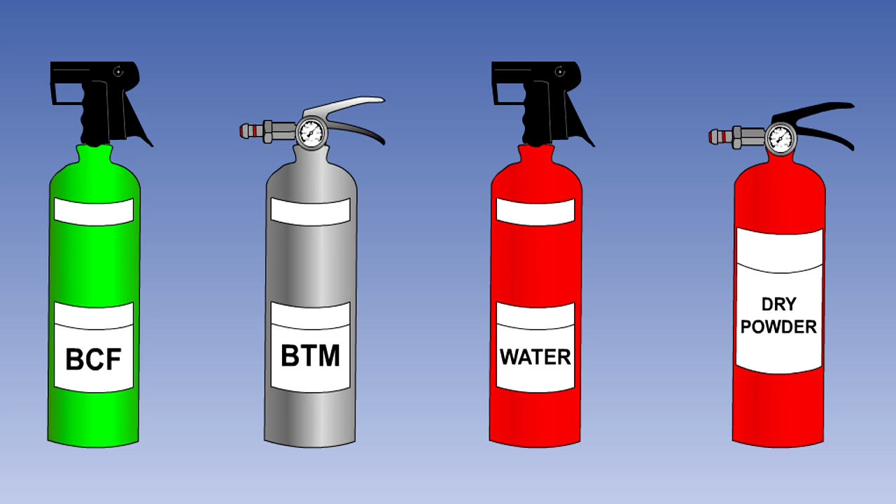Bromochloro-difluoromethane, BCF, is the most commonly used agent. It is also known as Halon 1211. It is stored in signal red, purple, brown, or green containers.

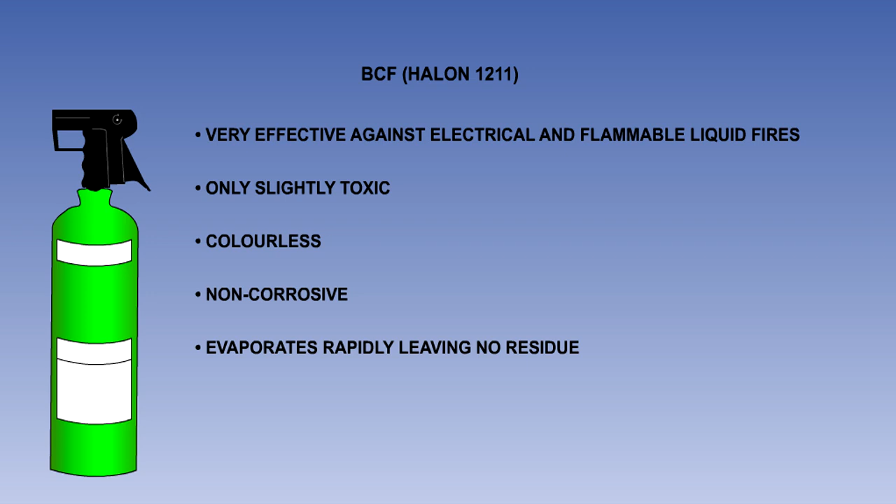This agent is very effective against electrical and flammable liquid fires. It is only slightly toxic. It is colourless, non-corrosive, and evaporates rapidly, leaving no residue. It does not freeze or cause cold burns, and will not harm fabrics, metals, or other materials it comes into contact with.

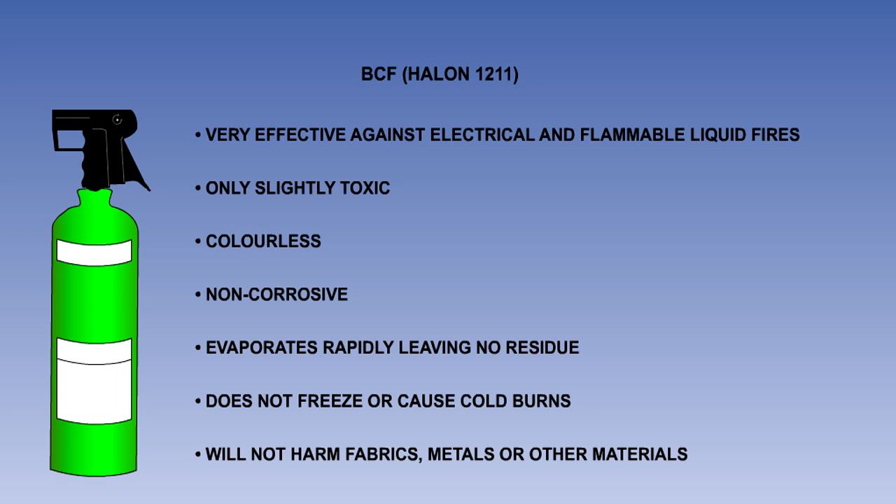It acts rapidly on fires by producing a heavy blanketing mist, which eliminates air from the fire source, but more importantly, it interferes chemically with the combustion process. It has outstanding properties in preventing reignition after the fire has been extinguished.

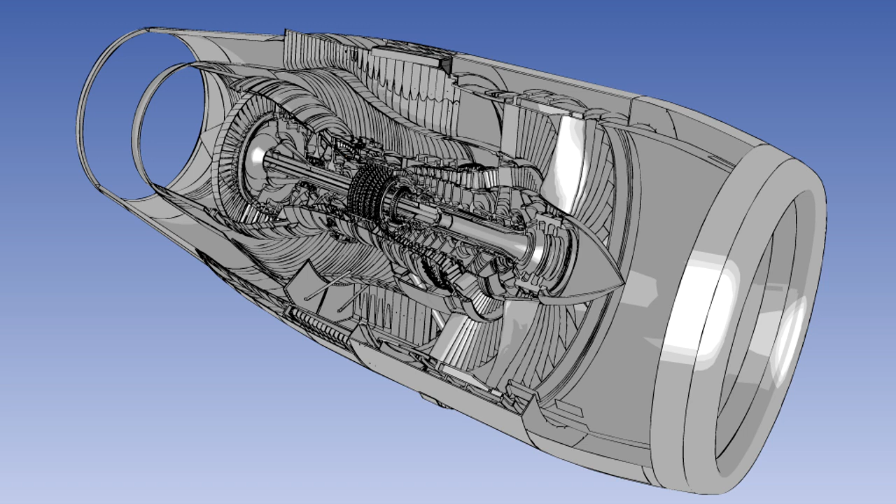Along with Halon 1301, it is widely used in the fixed fire extinguishers fitted to gas turbine engine power plants and in cargo compartments. It has the advantage that it can be directed as a liquid stream from a handheld fire extinguisher, allowing the user to fight fires from a safe distance. Many of the handheld fire extinguishers in crew and passenger compartments are BCF.

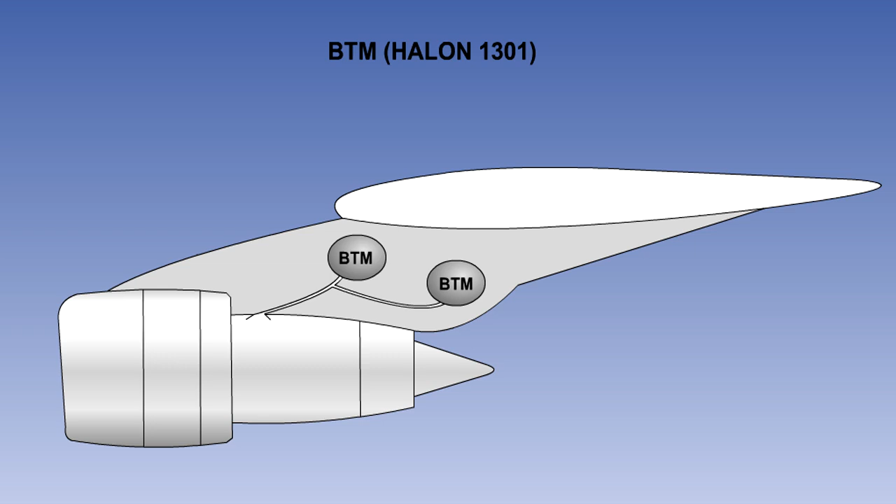Bromotrifluoromethane, BTM, or Halon 1301, is stored in grey containers and used in fixed systems for the protection of auxiliary power units, power plants, and cargo compartments. It has similar characteristics to Halon 1211, except that it has a vapour spray which is more difficult to direct. For this reason, it is not normally found in handheld fire extinguishers.

BCF and BTM are part of a group of halogenated hydrocarbons, commonly called Freon. There are other extinguishing agents in the Freon group, but only BCF and BTM extinguishers are recommended for use on aircraft.

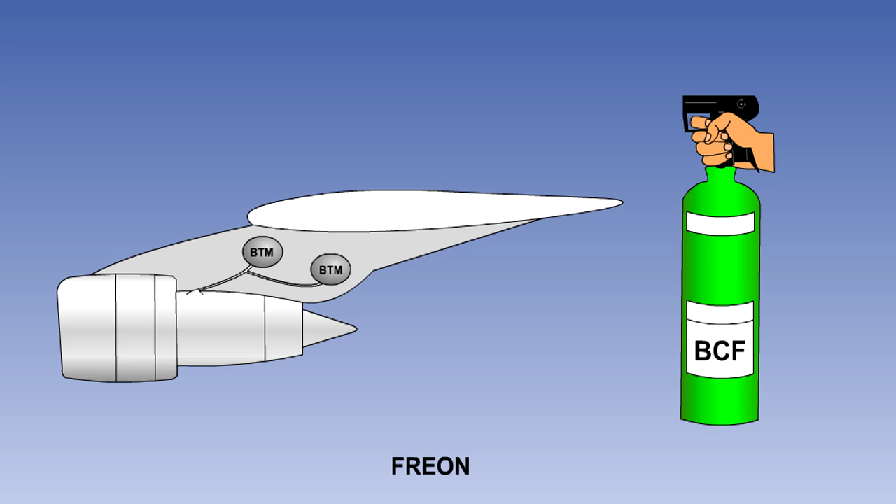Water, or water glycol, is stored in red or grey containers and is used in handheld portable appliances. The only purpose of the glycol is to stop the water freezing at low temperatures. It can be used in passenger cabins for combating fires involving domestic materials.

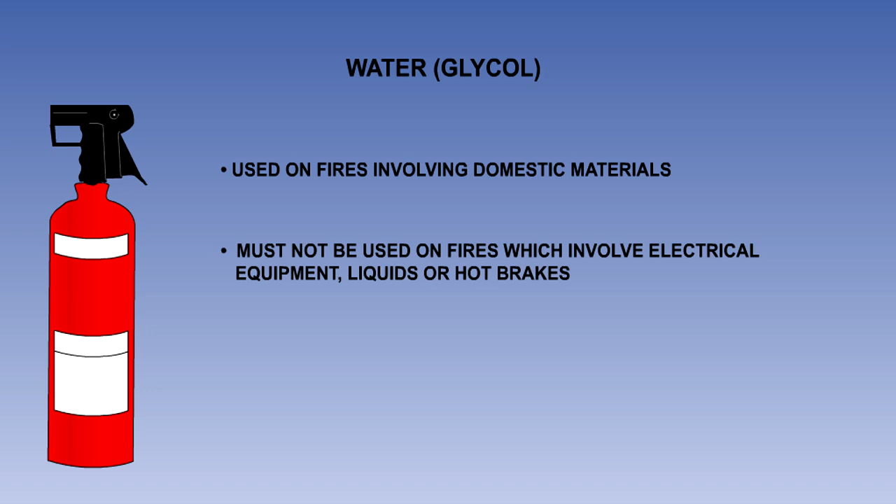It must not be used on fires which involve electrical equipment or liquids, nor should it be applied to hot brakes. The glycol is an antifreeze agent, which permits operation of the extinguishers at temperatures as low as -20 degrees Celsius.

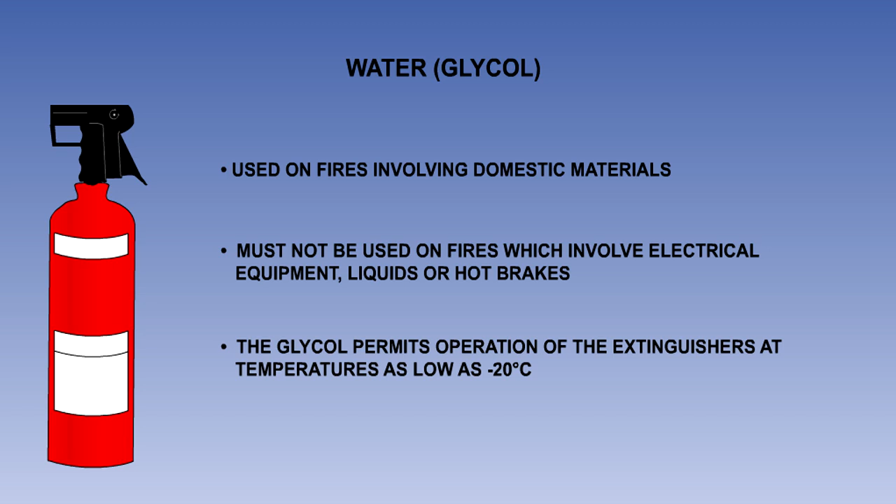Dry chemical or dry powder extinguishant is stored in a blue or red container with a blue label. The use of this agent in crew compartments or any other compartment not separated by a partition from the flight deck of large aircraft is not permitted.

However, some light aircraft may carry dry powder extinguishers, and their use should be avoided if at all possible, as visibility will be restricted and the powder can render otherwise serviceable electrical equipment inoperative.

The agent is a non-toxic powder, usually potassium bicarbonate, which is similar to talcum powder. It is very effective against fires involving liquids, wood, fabric, and paper. It should not be used on electrical fires, as it will cause damage to any otherwise serviceable electrical equipment.

Dry powder is best known for its application against wheel and brake fires on the ground. As a powder, it has no cooling effect, and this reduces the danger of wheel explosions or the distortion of the brakes and wheels.

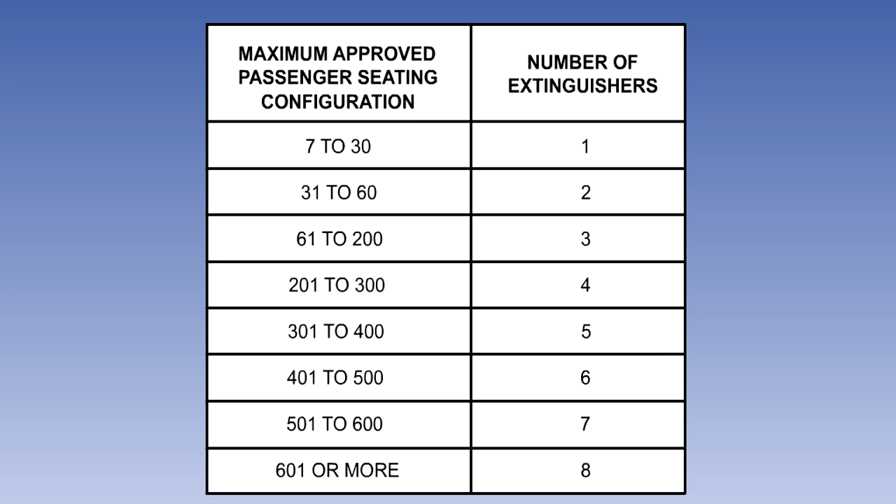They need to be memorized. There are 2 things worth remembering about this table. Firstly, the requirement relates to the maximum approved passenger seating configuration, not the number of passengers being carried.

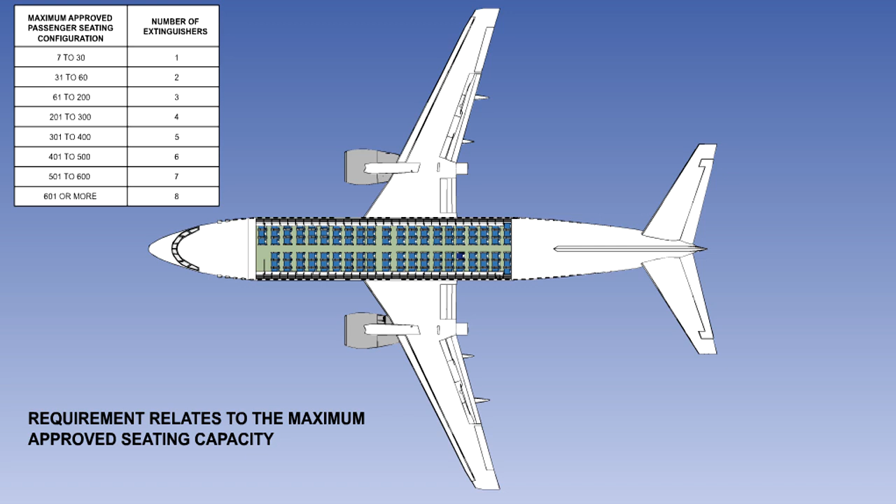So, for instance, an aircraft with a maximum approved passenger configuration of 200 must have 3 fire extinguishers in the passenger compartment, even if there are only 50 passengers on board.

Secondly, this requirement does not include handheld fire extinguishers that may be required in other compartments.

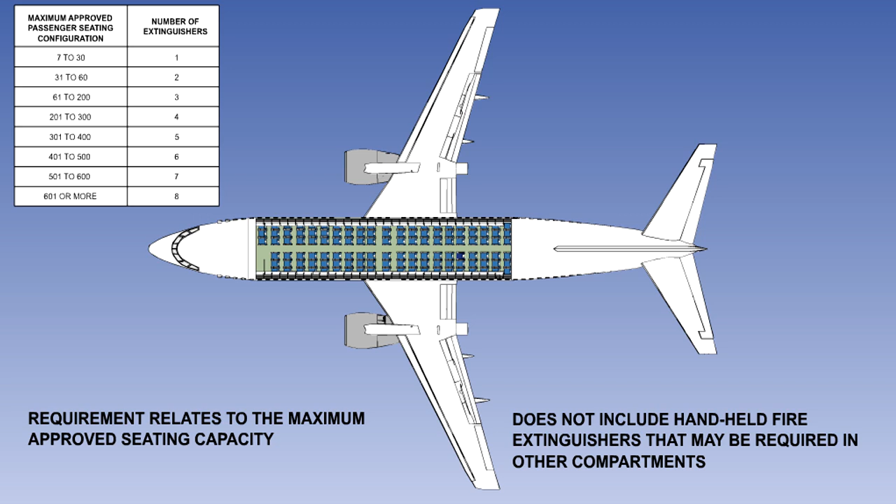At least one of the required fire extinguishers, located in the passenger compartment of an aeroplane with a maximum approved passenger seating configuration of at least 31 and not more than 60, and at least 2 of the fire extinguishers located in the passenger compartment of an aeroplane with a maximum approved passenger seating configuration of 61 or more, must contain BCF or an approved equivalent as the extinguishing agent.

In addition to these requirements, there must also be at least 1 BCF hand extinguisher conveniently located on the flight deck for use by the flight crew.

To make sure you understand, try this. If an aeroplane has a maximum approved passenger seating configuration of 201, but is only carrying 200 passengers, how many handheld fire extinguishers must be on the aeroplane? And how many of them must be BCF?

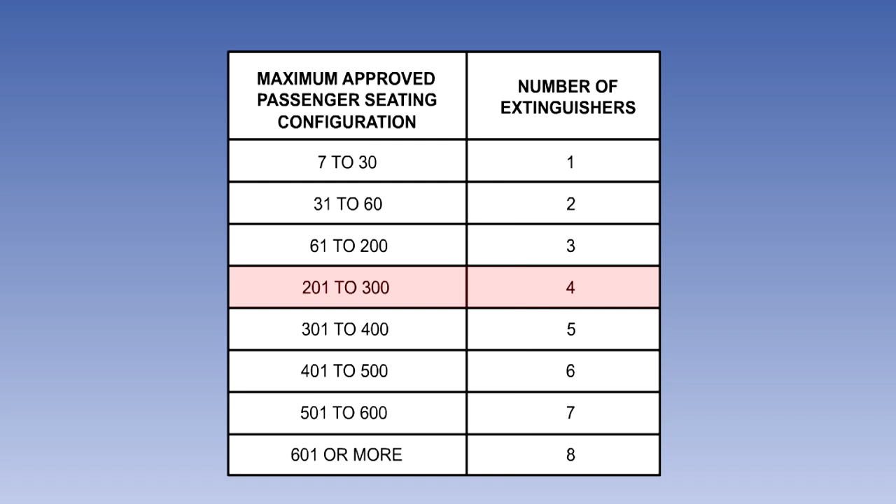In this lesson, you have learned that there are various extinguishers available for different types of fire. Bear in mind that you need to memorize the table of handheld fire extinguisher requirements.